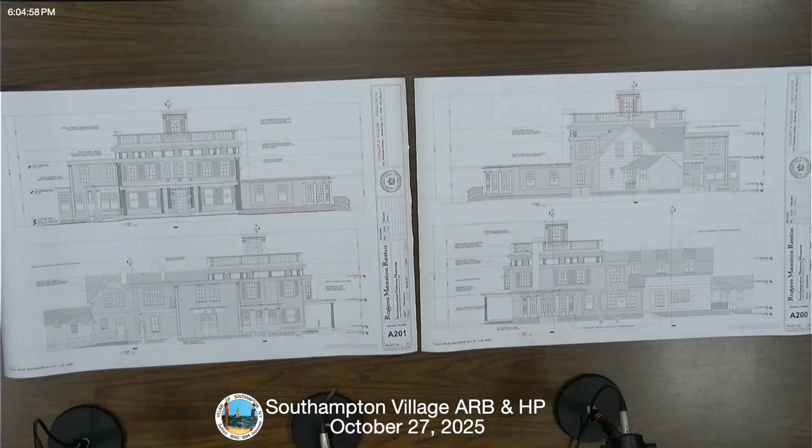What really needs to be restored is greater than that, but the project budget doesn't allow for it. So rather than do piecemeal around the building, which is sort of what was installed before,

we clarified with SHPO that we're going to stick to the original core of the 2.5-story forward part of the building. So that is the same 17 pairs of shutters, but instead of the various appendages that had been installed before we started this project, we will stick to just the 2.5-story oldest part of the building, including the cupola, which had shutters originally, but they've long since disappeared.

So the drawings that you have show bubbled changes as to which windows will include shutters, and I think I bubbled which would not, versus our prior submitted elevations.

Board members? I don't know what to say. I could, sorry, one more bit of information, just in case you're wondering what's going to happen to the rest.

When they have the funding to do so, the museum will restore all the shutters that were originally installed at different points throughout the life of the building. Some parts of the building probably never had shutters, but they will reinstall the places such as the south wing, west side, and south wing, east side, which have had shutters on it more recently, but those will not be included as part of this project.

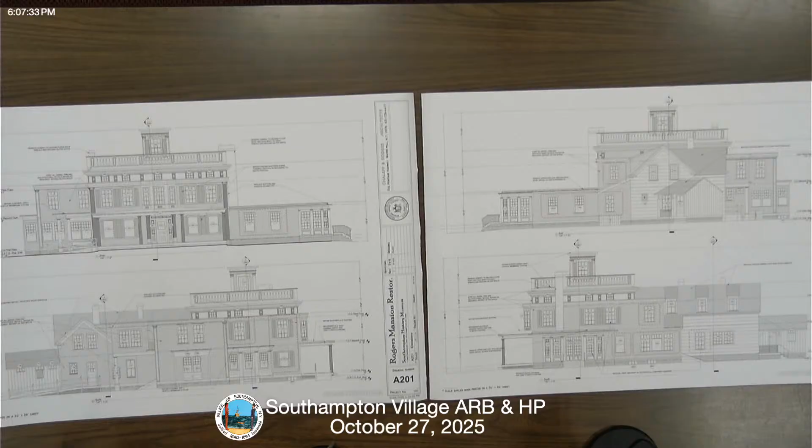I think it's acceptable. Great.

Do you have any idea about the length of time this is all gonna take? Well, most of the restoration project has been completed already. There are a few outstanding parts of it, including the shutters and some more of the windows. But the majority of the larger-scale work has been done already.

Okay, thank you. So what happens next? I think you can just vote on that. And how would we say that—the proposition to consider is that the changes are still ordinary maintenance and repair. I don't think you need to do anything more than that. Quinn, did you have something to say?

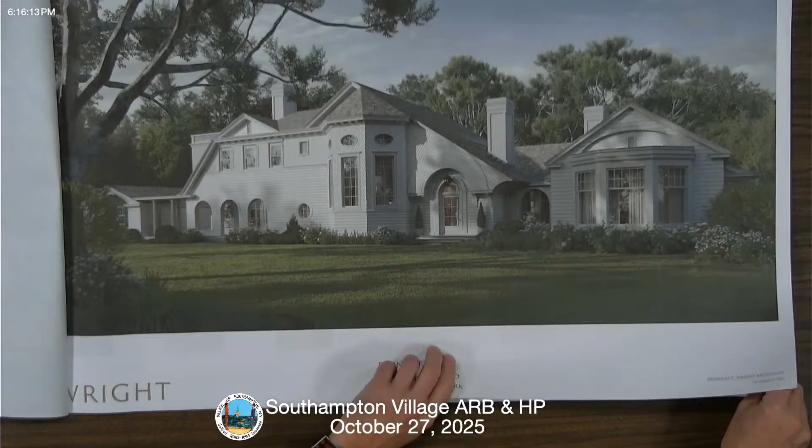This is a resubmitted set of items that you had requested: updated renderings, as well as some adjustments to the windows in the stair tower. The renderings are the major new portion of the submittal. So we have a front rendering with the smaller windows in the stair, and another angle of the front, identifying the materials: brick, shingles, painted shingles.

It's the rear of the house, again with materials identified: Doric columns, Chippendale railing, another view of the back of the house. Is the railing a new feature? No, that has always been on there.

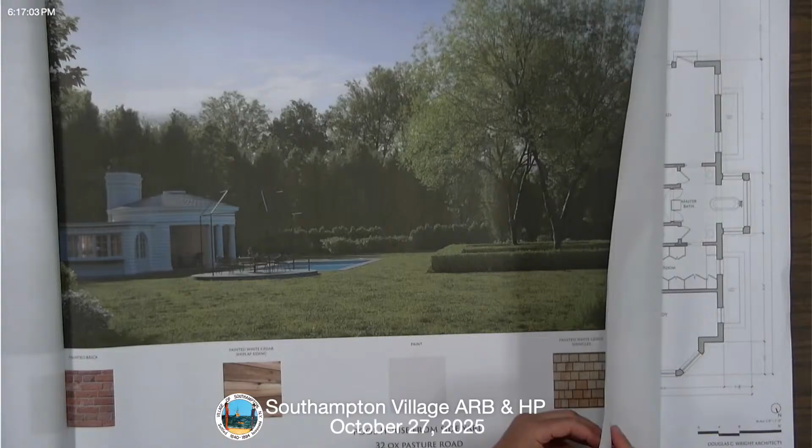And then a rendering of the backyard showing the pool house, pool, and gazebo, and then a portion of the back porch on the main house over on the right side of the rendering. And then the other items are basically the same. I don't know if you want me to flip through it or...

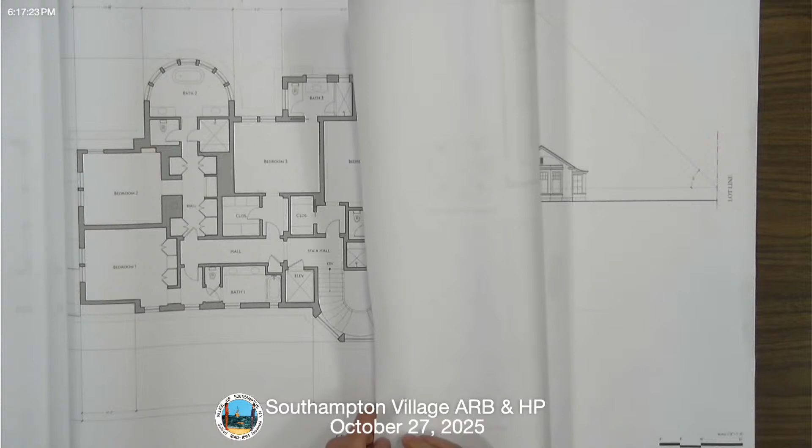So you had these previous renderings, right? Yes, we had submitted a watercolor rendering initially, and sometimes they want a more detailed rendering. I found that there had been substantial changes, or it was hard to see the different kinds of shingles on the first set of renderings.

Very hard to see, if not. So I appreciate you giving us a more specific look at what you intend. I found it to be an extremely busy facade with all the different kinds of shingles, including, I mean, everywhere. And although you changed those round oeil de boeuf windows into oval windows with cross hatches.

I find that discordant. I actually feel like the style of this house is not really in keeping with Ox Pasture Road. I think parts of it are good, but I feel like it's way too busy and ornate, considering the historic house that sits there now was an important house at one time, but it had been added on to and does not really contribute in the way that it should. But allowing it to be torn down, I feel like this just doesn't relate to the rest of the area, that it's discordant. Other board members?

So, what would you like us to do? Take a vote? No, I don't think you should vote yet. Can I comment on some things, and maybe that gives you some direction or suggestions? We don't need direction. That doesn't work like that. You don't give us direction. No, I think he's looking for... that's not what he's saying, he's looking for direction. Well, we're not... okay.

All I was going to say is there's a very famous house by John Russell Pope down the street on Ox Pasture Road that has a double gable, similar to this. And there are quite a few other white shingled houses in Southampton, and this was thought very much in that tradition. There are elements that are more in line with, is it Elm Gardens? This is the house he's referring to, which is a natural shingled house. Some of the other details recall elements of Elm Court or some of the other houses.

Thank you. I do think the highly detailed renderings, when requested, play up the shingle patterns a lot more than any of us really experience when you see them. I mean, I think we're all fans of diamond shingles or sawtooth edges, so I do think the shadow lines on this are making much more of the shingles than would be noticed.

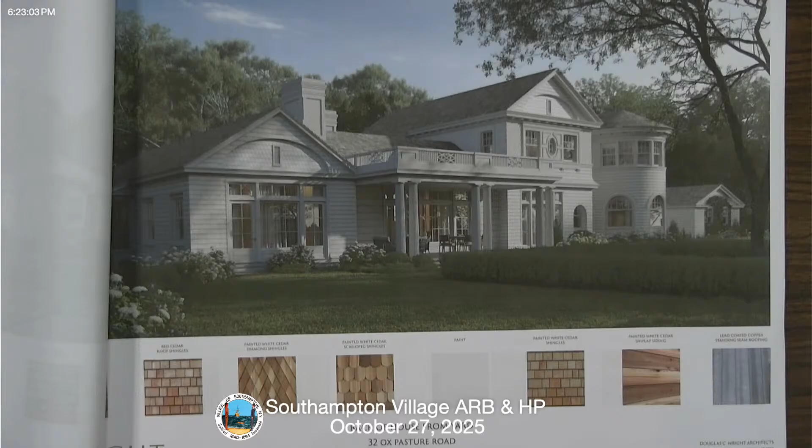But I think it's very much in the tradition of white painted shingle houses. Hearing your request for simplification, we could do some items to simplify it to get a positive vote. The busyness of the shingles, in my head, is first and foremost. They're not really typical of Southampton. There's a South Main Street house that they didn't do a very good job on, but that was famous, pretty close to the village, and it had different colors of paint that they took off, and it was a big hoo-ha for a long time.

But this has just way too much, even inside, like an ellipse, then there's rounded ones, and it just doesn't sit well. And the round, I never liked a lot of round windows. I know you took a lot of them away, and I could maybe live with that if we had something simpler in the facade. So I can't go with it.

So you're looking more for a classic, highly detailed railing as well? I don't even know, is the railing functional? What's the railing for, just decor? The railing is decorative, yes, it provides some balance to the porch. I feel like that's fancy in a way that I don't find convincing, I guess, also.

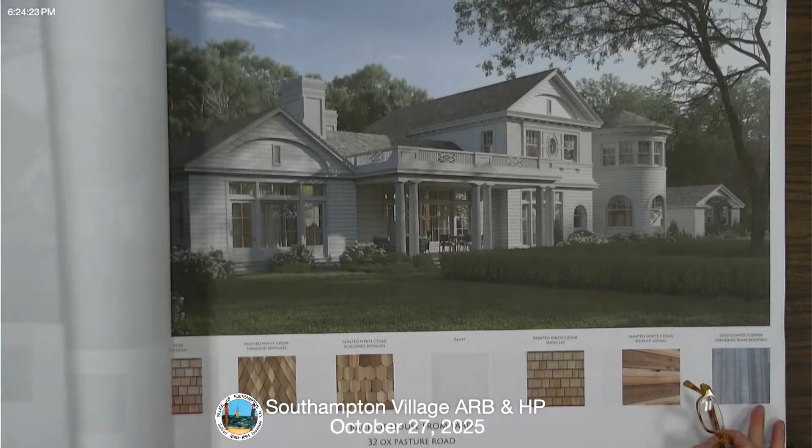But anyway, this is your house, so maybe you could come back to us next time with a simplified version if possible, so a much more simplified shingle style rather than a Queen Anne shingle style, which I think this is more. Well, I think it's a tradition, reference to the Russell Pope house.

So are you asking for an adjournment to the 10th of November?

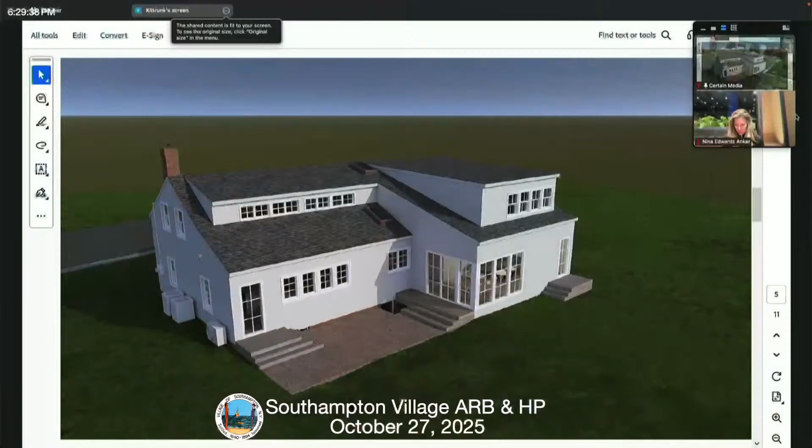Do you just have a measurement of how much you set back the dormer on the north side? Mr. Studenroth had said that either 1 foot or 2 feet would be appropriate, and we chose 2 feet. It looks better, going back. All of us think that was the successful change. Well, thank you very much.

Do you have anything else to tell us? No, unless you have any questions. I do not. Okay, public comment?

Public comment. Is there anyone here who wants to speak about this application? 7 North Sea Road. How about online? Nothing.

Then you can close the record for written decision. Motion to close the record and move to written decision. Second. All in favor? Aye. There's so few of us, it's kind of comical.

All right, you're on the witness, John. So just for clarification, do I get a yes or no today? You just got to wait, you know. Okay, thank you, that was kind of a yes. I'll have the decision. It has to be recorded, you know.

Because it really is historic, it's not pretend, but we voted to move to written decision, which means you're not going to have a problem. Thank you so much. Thank you, cheers. Thanks for your changes, you did a good job. Thank you.

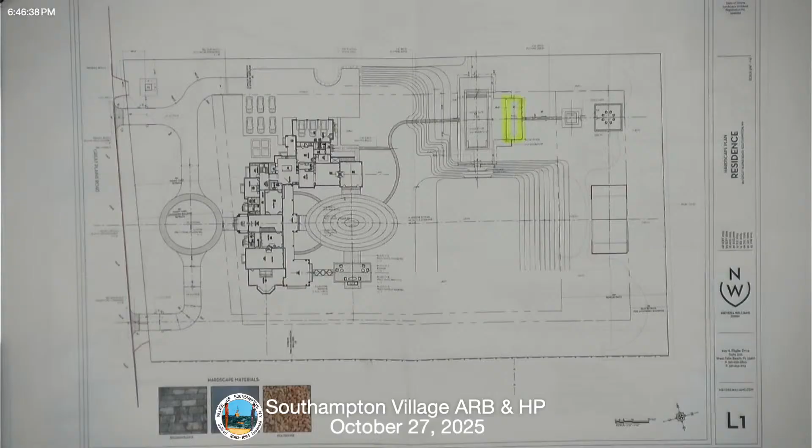Right, before computers. Okay, now I'll have to look at someone else's. Here, you can take mine. Thank you, go ahead, and I've got this. You need it? I gave mine, I saw that. Good, okay, all right, so this is the new version, correct? Correct.

Dated 9/23/25, right? Okay, but you have very little, okay, he said, you said your color and materials are the same? Yes.

It's a rectangle instead of a square now, with a different roof. There are 2 wings - did they just add onto it? Well, the other one had wings too, but it was squarer. It's pretty, it's a pool house.

Are these all windows, or is this open? The middle is open, and there are 2 changing rooms, a shower, and a small kitchen. It's all kind of open like that, which is better, I've got to say.

It's kind of a mess - it's all just open now, the whole thing. It's just a terrace with a roof, and there are 2 little enclosed wings for changing rooms. I don't have an objection to this, frankly. It would've been nice to have a more thorough treatment in the middle.

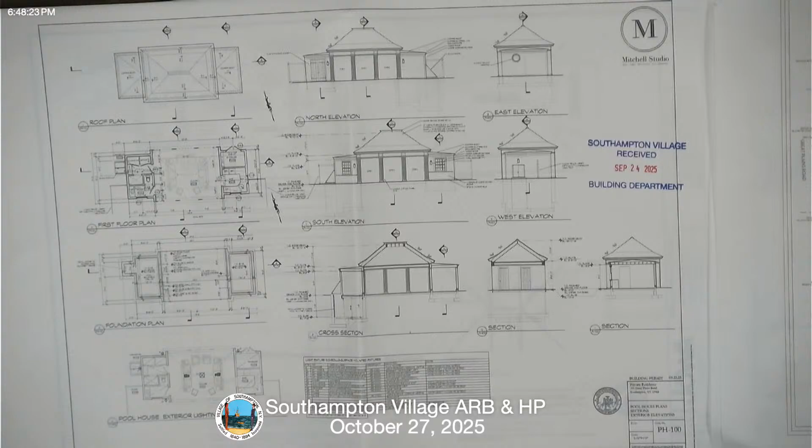So there's no doors anywhere on that - it's just all open. Well, the door to the bathroom and the shower. But nothing on the front or back, no glass. On the back there's a little storage room with a door.

Motion to approve the application. We need a written decision - motion to close for written decision. The address is 103 Great Plains Road. Second. All in favor?

Ellie Tamsin, 344 Hill Street - a shed addition to a pool house, previously approved plans. Oh, it's an amendment of previously approved plans.

Is there anyone here for this application? Absolutely not, online either. We have affidavits, so we can take jurisdiction. They're adding that little thing on the side, like an eyelash on it. Yeah, but I don't feel comfortable presenting it without them here. So why don't you adjourn it since you took jurisdiction?

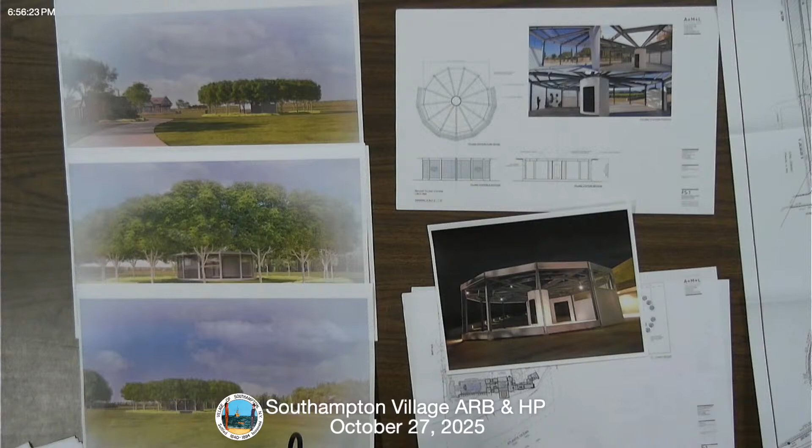We've also spoken to Simone Levinson, the chairperson, and Christina Strassfield, executive director of Southampton Arts Center. They're very excited about having this structure in the village. They're hoping their patron, who's also our client, will host some art events there as well.

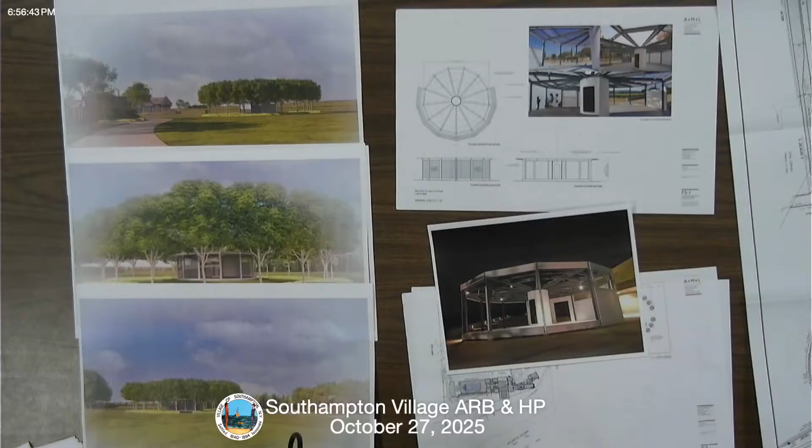We're more than happy to provide a night rendering, and we can give you more detail with the landscape plan about the fact that there will be no purview from anywhere to see into the light, and we know we have to be dark sky compliant.

Yes, you're in a historic district. It's an unusual thing, which I like, but it's a place where we have to be careful. If you were on Ox Pasture Road, it probably wouldn't matter that much.

My office is involved in that wetlands restoration on Gin Lane. It's right next to the large parking area for both the village and the Bathing Corp, as well as the trustees' parking. And there is lighting down there, I believe.

So that's not a good argument, just adding more lighting. That's actually private lighting. I'd say that's municipal lighting we're talking about. The trees are going to prevent us from doing uplighting, and the trees will also dampen any kind of lighting. I like the trees. We don't dislike it, but we have an obligation to deal with the historic district.

And you said it's 230 feet away from the contributing structure? Yes, correct. So do you think we could get that together by November 10th? Yes, we can, absolutely. So are you asking for an adjournment till then?

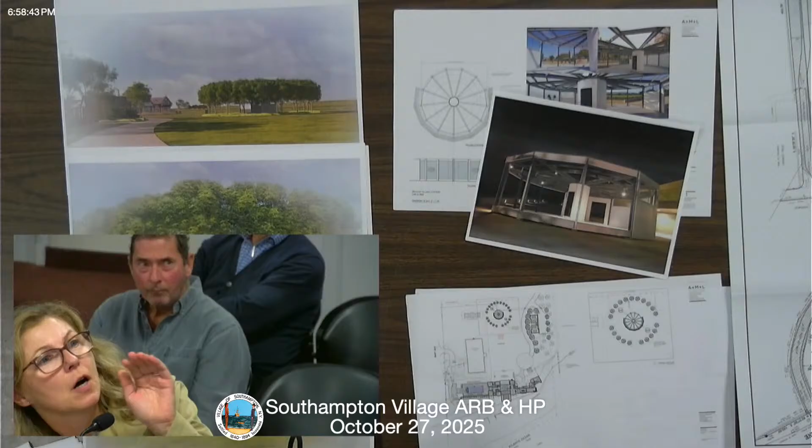You have to get up here, tell us your name, and stand before a microphone. Anna Kupczynska. Is there a roof, all glass? It's not, it's a solid roof. It's not shown in this picture. There would be a solid roof you couldn't see from there. And where do you live, Anna? 127 Pulaski Street. Thank you.

All right, motion. Anyone else? No. Anyone on Zoom, Sage? Okay. Motion to approve the applicant's request for an adjournment until November 10th. Second. All in favor? Aye. Thank you very much.

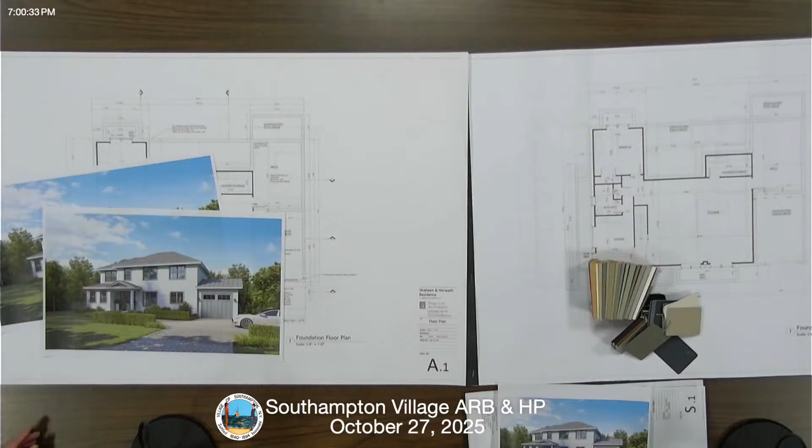Thank you. Here, honey, Susan. Oh yeah, the garage faces the street. Here you go.

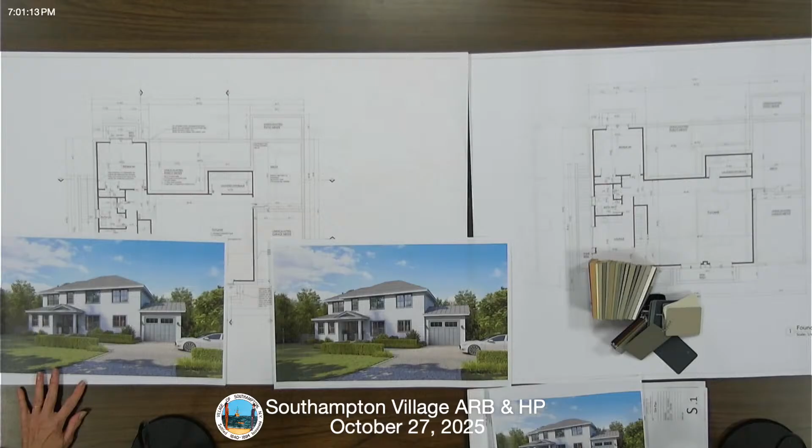For some reason I don't have 11 Henry. Lucy, is this in the file? The rendering wasn't about this one. Can I have a copy for the file? This is a house similar in the village. Could I use it first? You can use mine. Oh, this is for color, exactly, the black, yes, for graphite combination, closest combination.

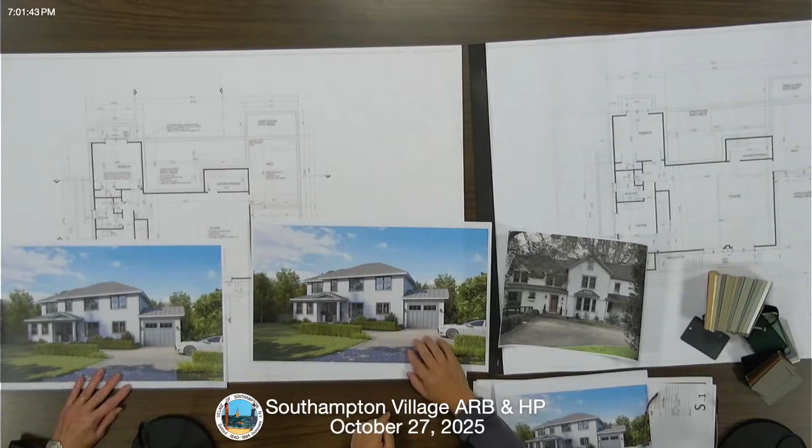Since when do we do street facing garages? The suggestion of a board member at the previous meeting was to change the profile of the front, to either recess the garage or bring it out by at least 8 inches. So we followed up, and thought it would be better to recess the garage. Looks better. Well, thank you.

We had a concern from a neighbor about too dark of windows. Instead of doing the gunmetal, which is darker, we went for a lighter shade, a cadet gray color. It's much lighter, so the windows are not so pronounced. Is that the same color as the garage door? Yes, exactly, this is the cadet gray. We were asked if we were using white frames, but instead we lightened it up because of a neighbor's concern. This is what we asked for last time, and this is the cadet gray we're proposing this time. We also have the white shingles that go with it.

There's currently a white house there, so it wouldn't be too much gray. We thought it's best to keep with the white shingles, and the cadet gray is just a slight contrast.

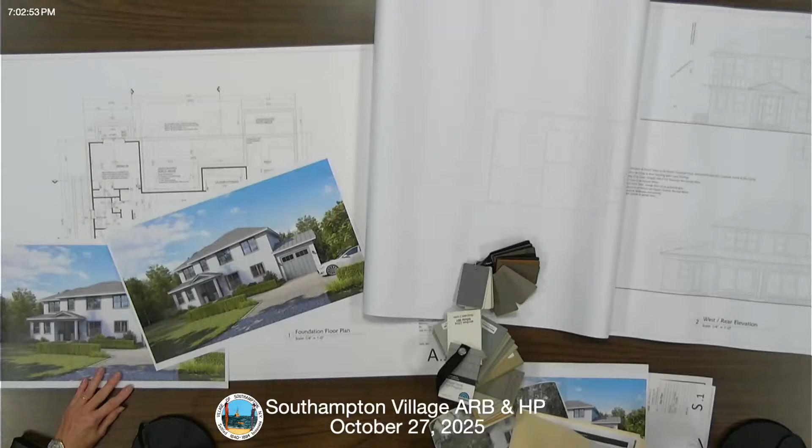This is the current house on the lot. What was the original? Do you have last week's first iteration? This is the whole file. It was about the garage facing the street, and thinking that was gonna be okay with me, but there's nothing really in there.

The front door is the gray as well, right? All consistent? Yes. Oh, the front door is black, I'm sorry. It's a darker color, yes. The garage door is gray.

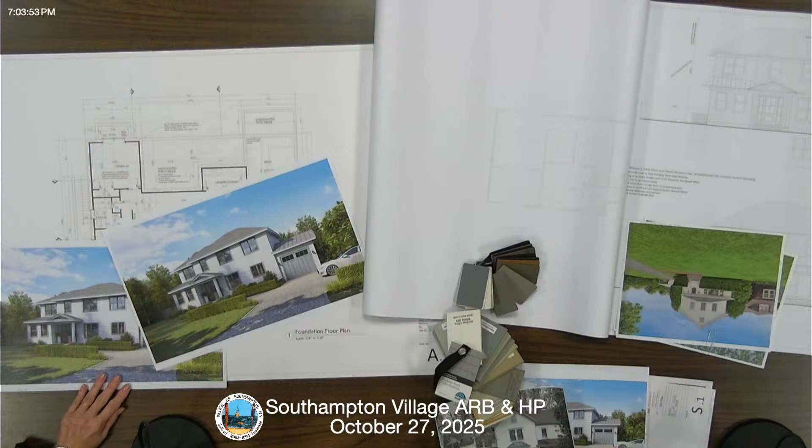So you can see on the rendering. I have an additional small one if you need. Susan, do you need a rendering, or I have another one here?

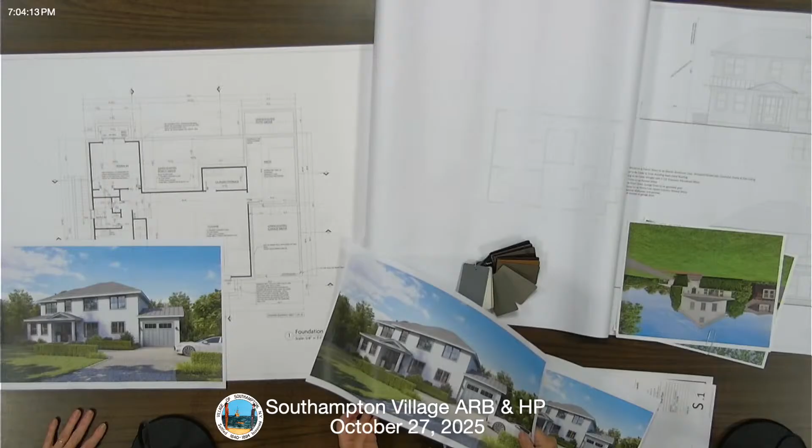Somebody else has to say something, because I just don't like it, with all the metal, black, gray metal garage door facing the street. I think it's strident. Above the garage we were hoping to have cedar, and I think the rendering came back a little bit more with the metal. We have to ask the builder if the pitch is right to have cedar, because we would prefer then to have cedar there, so it'd be more cedar.

And there's no way to turn the garage? No, it's a small lot, it's very small, or a smaller house with the garage turned, correct? I think it's a little undersized for the lot. But I don't like it, especially when it's tight.

The existing house has a garage in the rear, detached. We would prefer, if possible, to have an attached garage because it's next to the kitchen, it gives extra space, it's more usable. It doesn't become a separate structure that is not used as much in the backyard. And having the garage in the front, it's better in the winter.

There are, almost, I mean really, we have tried to not have that going on, especially. Okay, so that for me is kind of, and especially, yeah, I mean there must be a garage in the back. I didn't go in the back of the house when I drove around, but maybe I should have. It's way back.

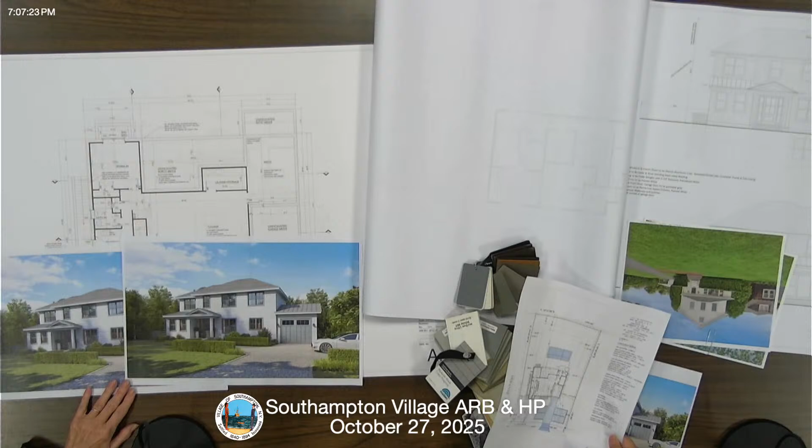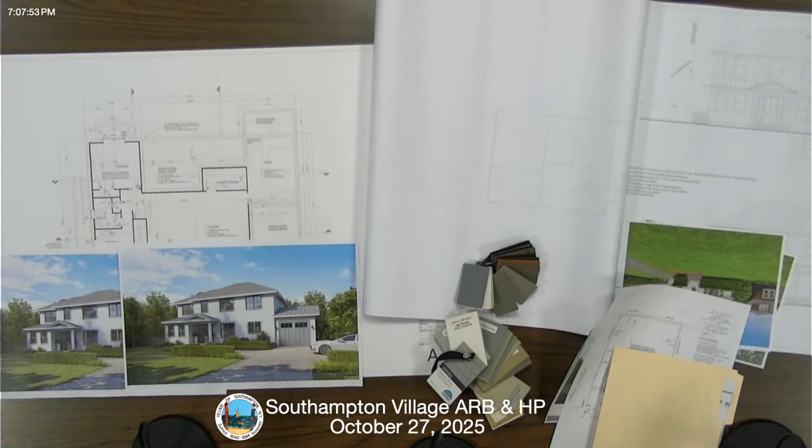Are there any other street-facing garages in the neighborhood? At the top of Henry Street, there is a house with the garage on the same side of the street, on the west side, already a house with a garage in the front. I don't know the address off the top of my head, but it's very close to the top of Henry Street. Meaning toward Hill Street? No, Henry Street is between Armand and Prospect, so it's closer to Prospect Street. On the corner of Henry and Howell Street, the house is a big white house, elongated, and it has the side of the house on Henry Street with 2 garage doors facing Henry Street.

And here you're proposing 1 bay? Here you're proposing 1 bay? Yeah, just one car garage. Just one.

Glass sliders in the back. What? Glass on the back. Oh yeah, way too much. So let's deal with the house.

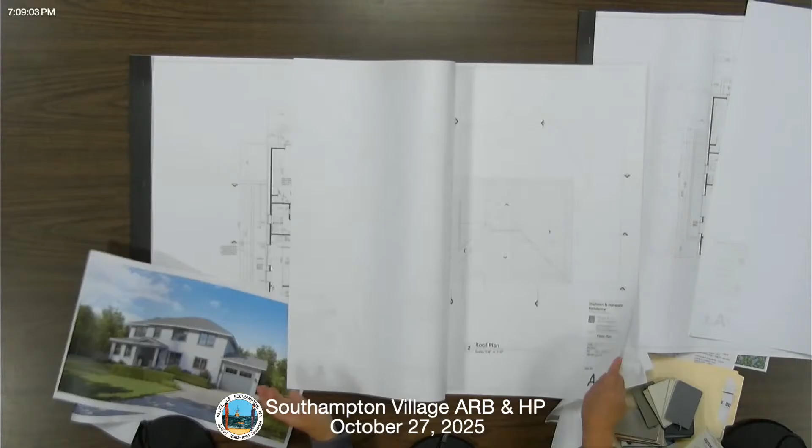So the back, this is proportion of glass to ratio. We have a covered porch and there's 3 glass panel doors. This is a Lacey special. So the amount of the rear west elevation has 3 from the living room and 2 in the dining room.

We can't really deal with the inside of the house. You keep referring to that, and that really is not our concern, but that doesn't matter to me. What matters to me is the amount of glass on the rear elevation, west, that it's pretty much metal roofing and glass. And the light, I mean there's almost nothing else. I think that's excessive, and there's pretty much the same in the front.

We built this house very similar to one on Edwards Street. The houses are all the same, but we always make you reduce the back glass, don't we? We've reduced the glass from our previous home, from the 99 Edwards windows. Okay, well we're only talking about this house now.

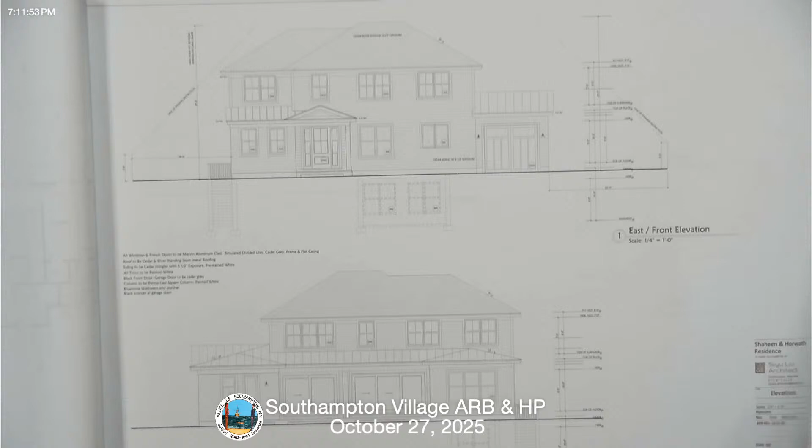Yes, we wanted natural shingles, and the rendering came back with the metal. Well, maybe we could clarify that. Because I think that would be an improvement. That would not be an improvement.

And the siding, I was asking - is it siding shingles? Excuse me, the siding is shingles, yes, it's like this. Painted? Yes, painted white.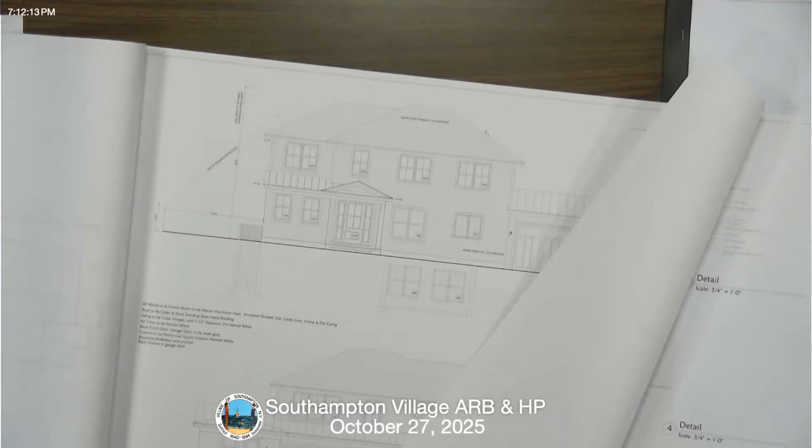The only area that has the metal roof should be where the pitch is very flat, like on a covered porch, and in the front. I can sign off on the metal roof over the garage into wood shingle right now. I think we gotta - I don't think we're at that point. Do you? No, we're not at that point.

Do we have the shingle color, because it looks gray in the rendering, the shingle of this house? It was gonna be gray. That was the first one, no, there's not gray shingle - it's white, an opaque white. Do we do a white? White, yes, it's white.

No, it's just confusing - it's white. Because is it an asphalt roof or is it a shingle roof? No, no, it's wood, cedar shingle. It's a wood shingle. So it's a cedar roof, just so we're all clear - a cedar roof, a white house.

Yes, the garage roof is cedar. Cedar, correct. We will also change it into cedar. Right, good.

The door's black, everything else around the windows is gray, and the garage door is gray. Right, cadet gray, this is the light color gray. And then the back of the house has a lot of light, a lot of fenestration.

But you see why we're a little confused - there's no list and we're looking at that picture. Yes, the list is - it's actually a white house, doesn't look like a cedar shingle roof, but it's written here. Is it a black door? Is that written somewhere we could check on the elevation? I don't know what to say about that.

I would make it a white door, I would get rid of the black door. Okay, so we could cross that word and change the front door to gray, the same color gray, to connect - yeah, we can change that, that's fine. Great, but we can't move ahead - this is too many things to just move ahead, I believe, unless we address the fenestration in the back. How can we address that?

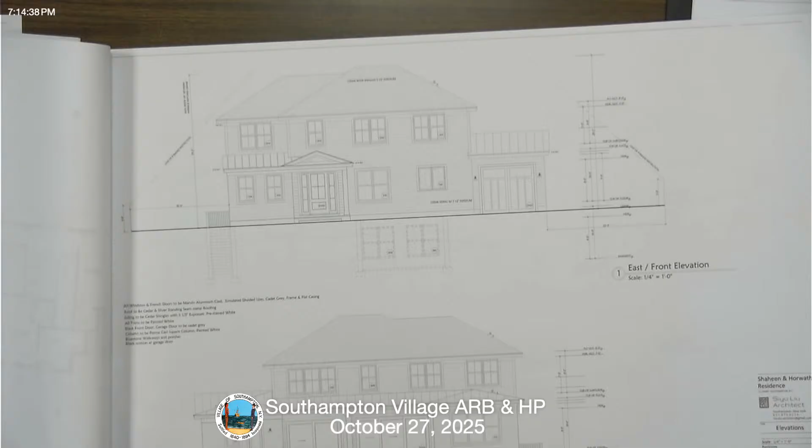Almost none. Well, we passed the HERS rating for energy control, and then the roof is, whatever covers the light doors, is covered. It's a deep porch there.

That's why we have the metal, well, it's a nice deep porch, so we can use the porch to put a dining table on it and chairs without somebody falling off the back. The porch is like 14 feet deep. That's why we have the glass, to get light in.

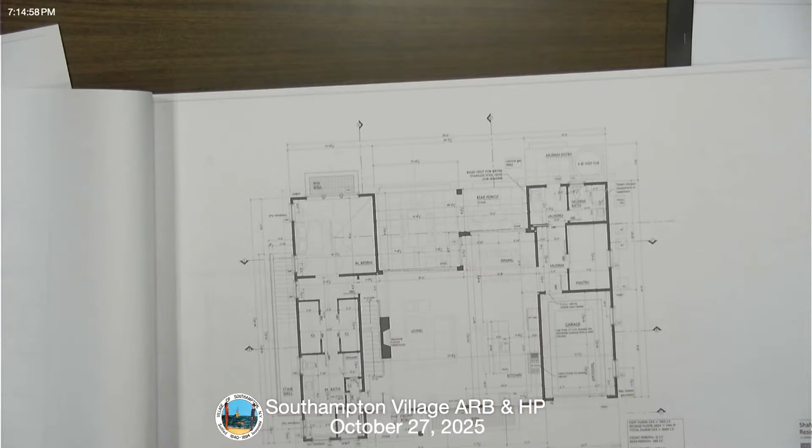And we passed energy. It's right here in the report. The porch is right here, it's a deep porch. They're talking about that rear big terrace, that the roof line overhangs the whole thing to the back.

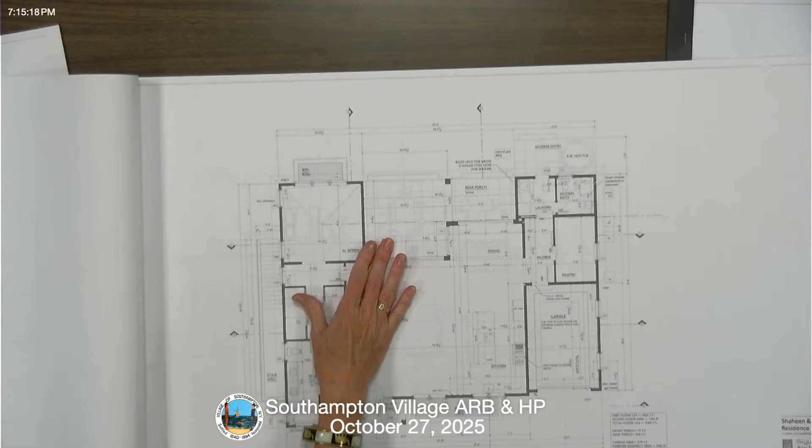What are the dimensions of those doors? What's the height, 8 feet? Do you have them? There's no numbers in there.

It's 12 feet. She said 12 feet wide. I believe they're 9 feet high? No, it's 8 feet high, okay.

Okay, we'll have the measurement of the glass doors right now. So the glass doors, the set of 2 versus the 3, they're not right up next to each other. One's pumped out, pushed out.

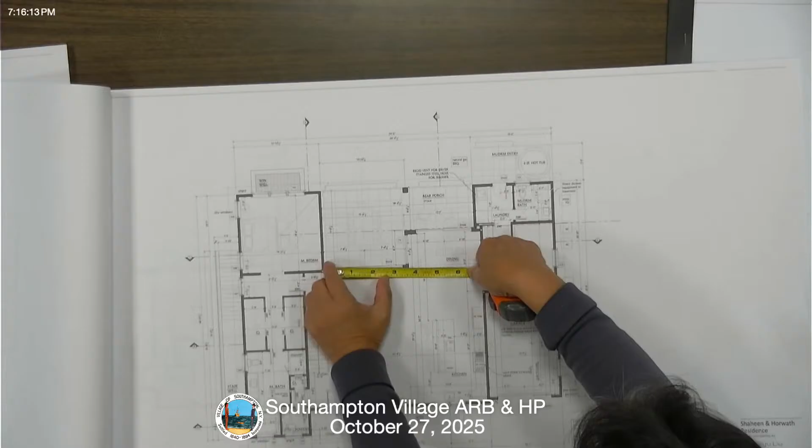That's a whole different feel from the rendering. There's 3 doors, and then there's an angle with a piece of glass, and then you have 2 pieces of door where the porch is narrower. We did not do a rear rendering.

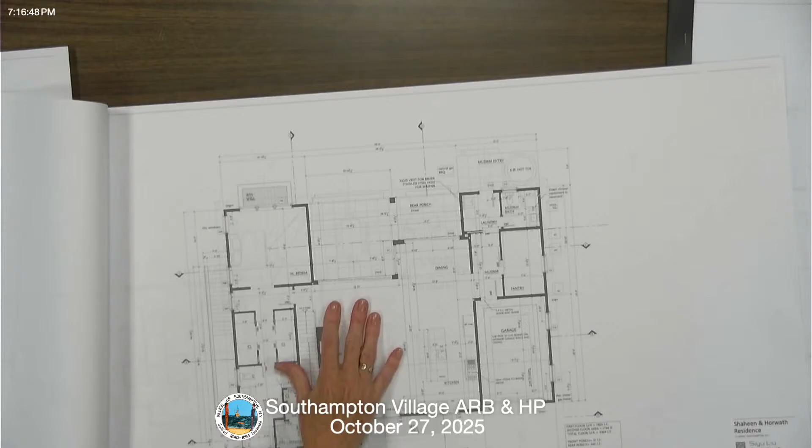That's completely different. So the set of 3 doors back here, and this is wings of the house, it's all covered. All three doors, all the sliding doors are covered. A very deep porch.

And that's why we have the glass, because when you have a covered porch, it makes your living room very dark, so you need more glass. Yeah, that's very different now. And then you can enjoy your backyard when you're sitting in the living room.

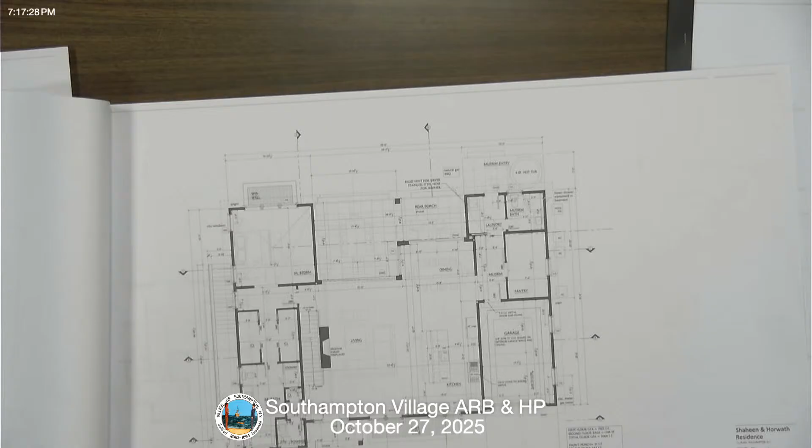So the covering over the 3 doors goes to the line where the 2 doors start? Goes all the way to the back. It's almost 15 feet, a 15 feet deep porch, right?

Okay, as far as the roof, the cover. Yeah, it's like 14.9, the patio is 14 feet 9. The whole thing's covered, with the eave. It's 15 feet. Why isn't there a better rendering where you can see it?

It's in the drawings, but not in the rendering. It's to allow in the summertime so you can have guests outside and flow with the living room in the small house. We just want to see the house.

Okay, board members, does that mean we've resolved anything here or not? Well, I think that the overhang over the sliders might be okay. Yeah, I agree. I'm still not happy with the front-facing garage, so much attention drawn to it, as if it's the main feature of the front of the house.

Do you think if it was pushed back more than 8 inches, it might help? But then the laundry room or the mechanical room, aren't you? Well, I'm just curious, if you pushed it back a bit more than 8 inches, it wouldn't be in the front per se, it would just look a little more natural as a garage.

Do you have a little more room to push it back some more than just 8 inches? No. You can't max it out?

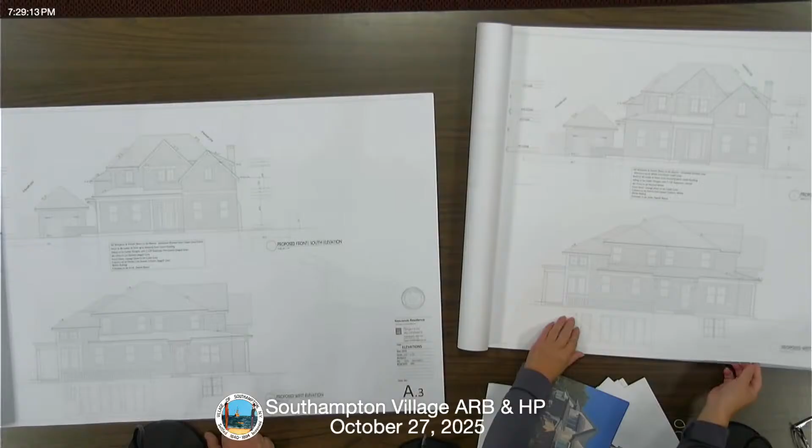Okay, and then we cut off a lot of lights in the back. This is the back. And the chimney is what? Danish blend brick. Doesn't look bad, no?

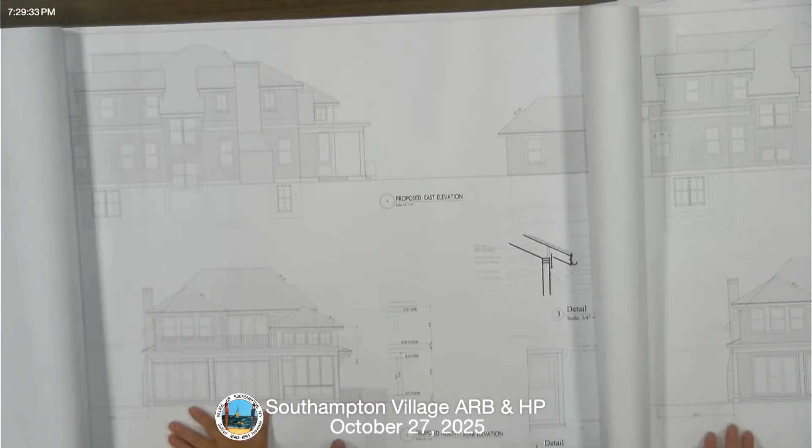We cut off one door panel in the rear. We cut off all the transoms, both in the breakfast room and in the living room. We cut off all the transoms, and we took one glass panel off here, and therefore we reduced more than 20% of the glass.

What about the balcony above and all? Yeah, we'll go back to that next, but let's just stick to the glass, and then we'll talk about the balcony. So it's like the Henry Street project, the lower doors, it's the same situation.

They are pushed back because this is a 2D drawing, everything appears on one plane, but they're 14 feet deep, and there's considerably less light coming into that lower level.

Could I ask about the chimney? It's not tall enough, is it? What is this? That's not a chimney, is it? Can you point it out again?

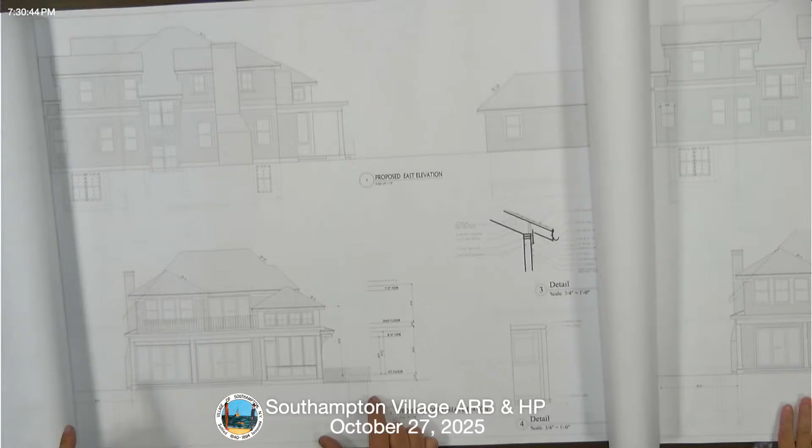No, that is a chimney. Yes, that is a chimney. Looked like it to me. Yes, that is a chimney. So why doesn't it go up higher than the roof? Doesn't it have to clear the roof? I mean, yeah, something's wrong.

It clears the first ridge here. There's rules, I don't know what the rules are exactly, but it has to, I'll look at it. It should be up near the roof, but that's up to you. It's just saying it has to go beyond the roof, and that does not appear to be that way, but you could explain it to me.

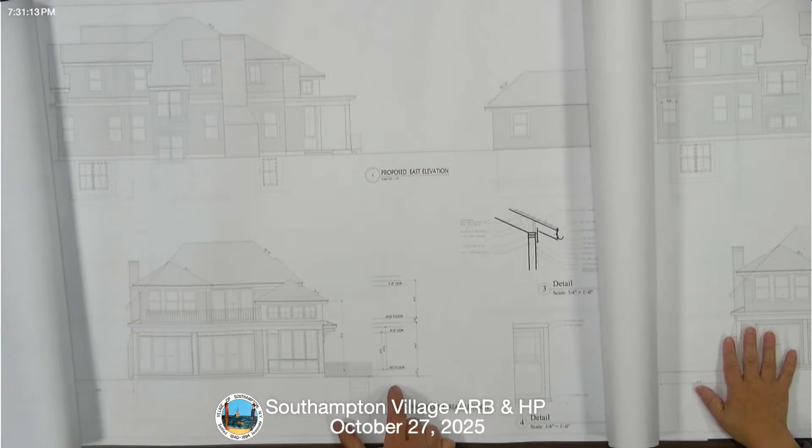Yeah, there's a peak, look. It's about 2 feet, with a 10-foot projection. I might have drawn it a little too short. Yes, you're right. Well, how did that go past the building department?

What is going on? No, we go to ARB first, we didn't go to the building department yet. Our building department didn't even look at it yet, to see if it was legal. Well, a building inspector would have had to review the plans for zoning compliance. After ARB approves, we go for the real building permit.

What are we doing? This doesn't make sense to me. Why am I finding this? I am not in the building department, I'm in the ARB, and I don't know why I can see that the chimney is too short. Well, the plans were reviewed for zoning compliance, and they're gonna get reviewed for building code compliance, otherwise they won't get a building permit.

I know, but doesn't that go to them before us? It would have. Okay, so that's supposed to go to them before us. So I guess let it go to them. I mean, why are we wasting this time?

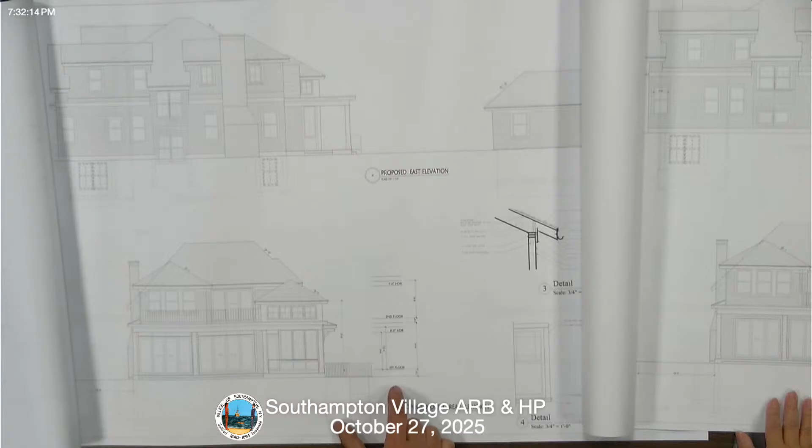I don't understand how we're doing this in the wrong order. But it's the same project, it's different. Does it make sense? I don't know, it is different because you're gonna have to change some of the design perhaps. Right, well I think we should continue.

This was signed off by the building inspector before it was advertised for a hearing. Who, does it say which one? Looks like Kyle Matheson.

What do we do? Alex, could you give us some advice? They don't look at this yet. This is the same chimney. They look at the code, poorly presented. They look at setback coverage, and then they just look at the materials, which are so poorly rendered and presented that it's super difficult. The chimney's maybe the right height in one place, not the other. I think it's a lot to ask to bring terrible, unprofessional material to us.

Let's keep it civil. Okay, it's very hard, there are inconsistencies in this entire package, and it's very hard to consider and very hard to read.

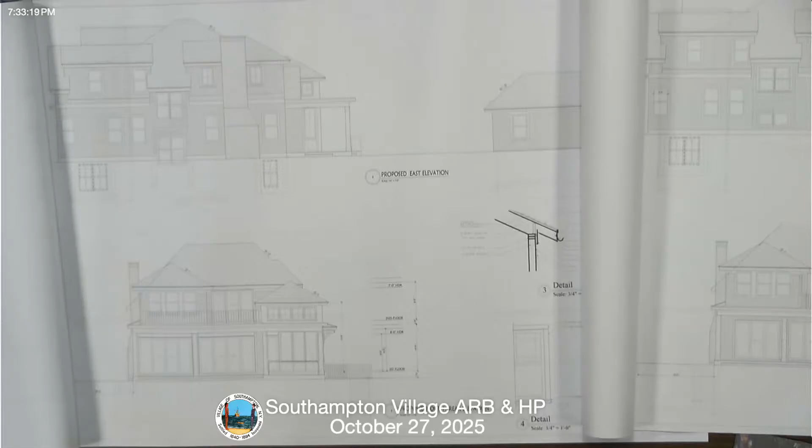Yeah, so here's the chimney, here's this page, you can see A4. But that still doesn't... we're not Sherlock Holmes. I don't know, all right, well let's just keep going. I don't know, it's a little, it's quite difficult, I have to admit, sort of groping around in the ether. Can we just understand what the problem is? Are we talking just about the chimney, or what else are we talking about?

Can we focus on the material and the color? No, we are running the meeting, and we are asking you questions. You can answer them or choose not to. Okay, fine. So part of it is the chimney, which isn't resolved and will not be tonight, is that correct? I don't want to be spoken to in that way, sir.

We're going to the gas chimney, right? With gas fireplace? Yes, this is a gas fireplace. I don't need to clear the roof. Okay, so we can refer that back to the building department. This is purely just for the look. Well, it's also the materials, Lucy. Yeah, I meant the brick chimney that we put in here is not really necessary to put it there, we put it there for the look. Because it's a gas fireplace, all I need is a PVC pipe, and then I can have a little cover on the roof and I'll be finished.

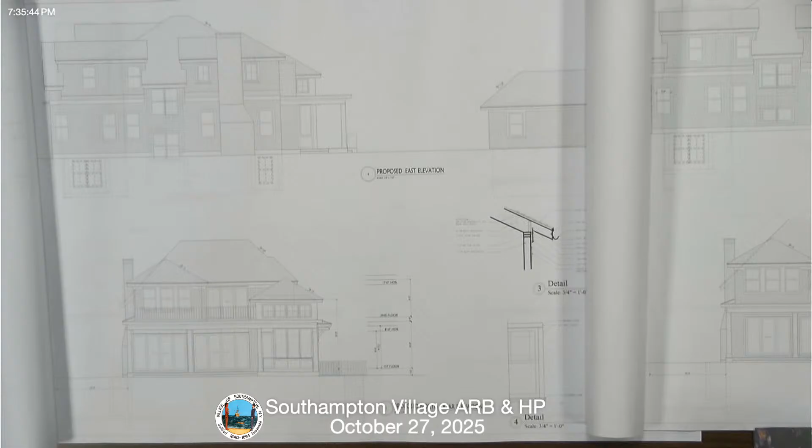And then something was blanked out. That was a pool house that you can't do. What is this, what's blanked out? It's by the pool. Oh, it's a patio? No, it's a pergola. A pergola? Yeah, the pergola was on the original application.

How many bedrooms are in this house? Six. And the parking spaces? Five.

How many feet is the garage from the property line? There's a line drawn, you mean the setback just here? Like 12, 20, 12 feet? Here, 12, are you asking this part? Yes, the 12 feet, the green line. Okay, they've got that pretty well, that's not even our job.

All right, let's go back to how it looks in the front. So, we're gonna do cedar roof and natural cedar sidings, natural cedar roof, and we're only gonna have a tiny bit of metal roof in the front. All the windows are gonna be white, the trim's gonna be white, and we're gonna do the door cadet gray, which we have right here.

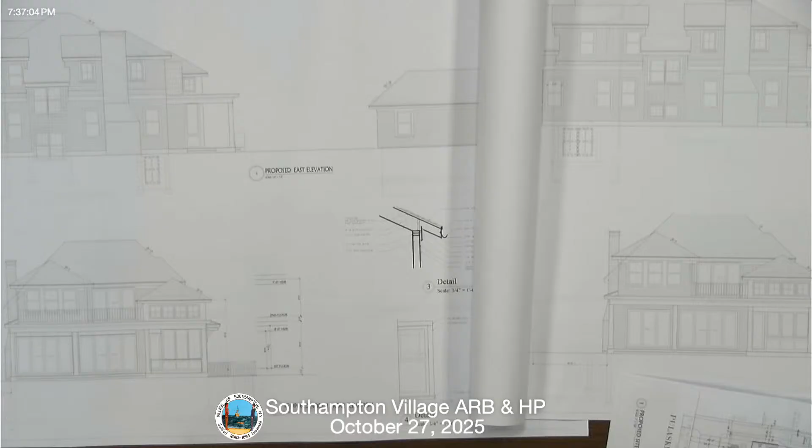So only the doors are cadet gray, and the metal above the front porch, right? And does it hook up to the cedar roofing? No, it just goes into the wall, it's by itself. Okay, and what color, that lighter gray? It will be light gray, yeah, or something like a cadet gray.

Seems to be bandied about here tonight. What's the light there, is it in the ceiling? Yes, all recessed lighting, we're doing recessed light everywhere. Oh, you are? Yeah, you can't tell. Okay, well, I'm feeling better about it. Looks like a vent. Yeah.

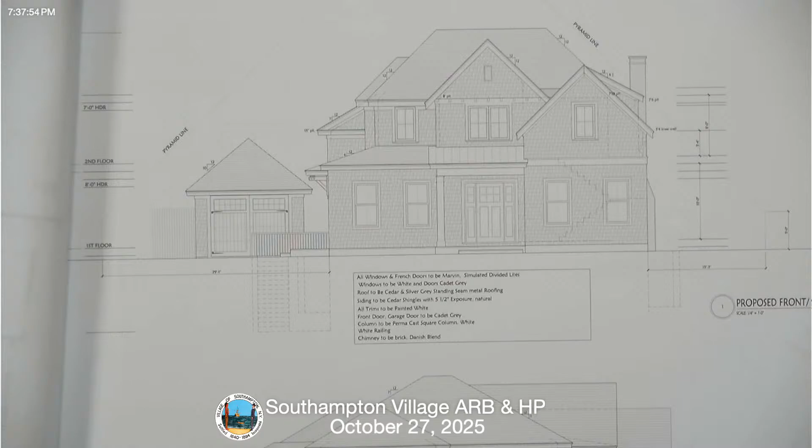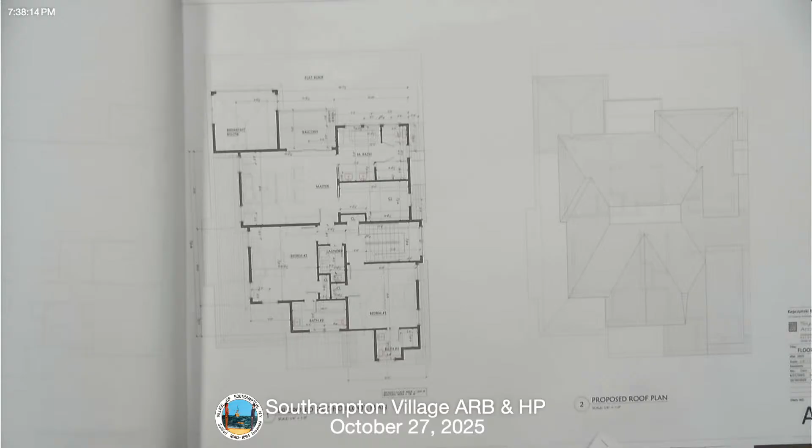Okay, so should we get to the balcony in the back? Are we done with the front? So we feel satisfied that the light, because it's recessed, is all right? Yeah, didn't we do this once before, can you go out on this little balcony? Yeah, we're doing a small balcony, I actually did a presentation here. How deep is it? The depth is 8 feet, 7'11".

That's not so small, and on this side is a roof, so it will totally block you. On the other side, only 3'6" is passing this side of the roof, and we're gonna put a screen here.

Like a wooden screen? You can see there's a screen here. How come you don't have that? No, I don't think we have that prepared today. Oh, I should have been able to see that. I'm sorry.

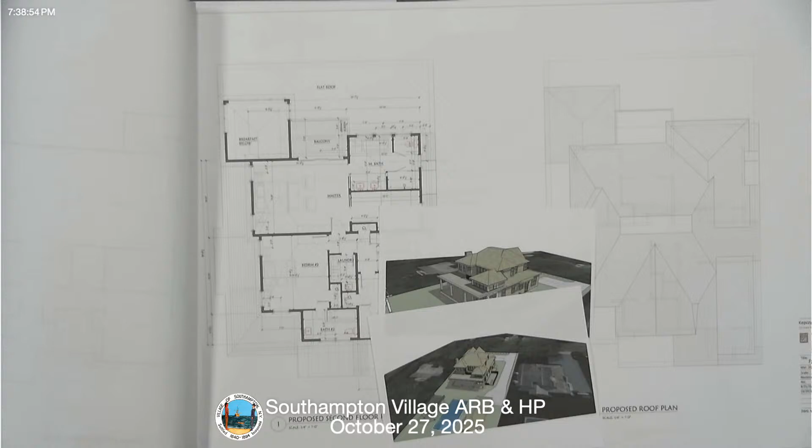Well, that should have been in there, I mean, it's like a free-for-all. Thank you. I mean, you know better. There's rules, why have them if we just don't follow them? I'll just look at this. Oh, here, I gave him mine. No, you can have mine. All right, that's a big help, Lucy. Thank you, could have been.

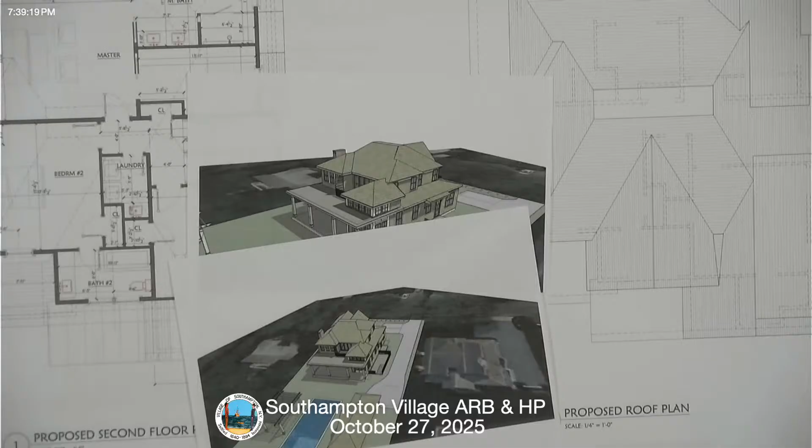And the house, so what is this, the trellis that's on the balcony? It's like, you know, if you're in a hotel, it's like a flat slatted wall, like a fence.

What's the depth? 7'11", it's the depth, but the part that actually sticks out is only 3'6". But that doesn't mitigate noise or whatever. It's a tight lot. So what's the length? What's the square footage? What's the width and the length? The length is 11 feet. So it's like 88 feet, plus minus.

And this is off a master bedroom. Yeah, that's what everybody says, but I don't know what people's habits are. How close is the house next door? Do we actually have anything that would tell us that? No. I was over there, it's tight, right?

But there's two houses, Pulaski, 60 Pulaski Street, which has a similar situation where there's a second floor balcony. One side is screened with some kind of privacy wall, the other side is a fireplace. And my neighbor, 117, same thing, he's got a little balcony on the back. I actually had a conversation with him and he didn't object.

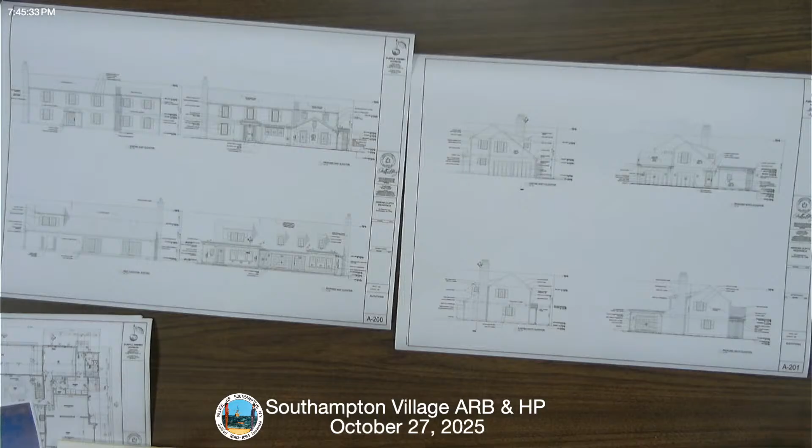Do we have anyone from the public who would like to say anything about this house? No? Do you have any more to say? No, I'm actually trying to keep it quick. You guys got a lot of stuff to get through, so we appreciate the changes.

I have one question actually - the back of the house, that second floor window with the shutters, that's existing? Yep, that shed dormer kind of gave us the vocabulary for the new three dormers we have. The shutters are like this big, and the window is this big. We could change those if you need, but it seems they look proportional on the rest of the house. That was just one that was way off.

Motion to approve the application of Hampton's Hideaway LLC, 145 Somerset Avenue. Second. All in favor? Aye.

Aye. Good luck, thank you, sir. Thank you so much for the nice work, making the changes made a difference. Looks great, appreciate it. And it's nice to see you guys in person. Last time was over Zoom. I hate Zoom too. Pretty awesome, that street, considering. We've been there a lot too. It's our home away from home, a great holiday season. Thank you, guys. You too.

Here we go, 161 Breeze Lane. Is that right? Yes, we have the affidavits and they're in order. Didn't we already do this, was there a carryover? No, it's new.

I think I put up the existing house. Pretty straightforward application, hopefully this is relatively quick.

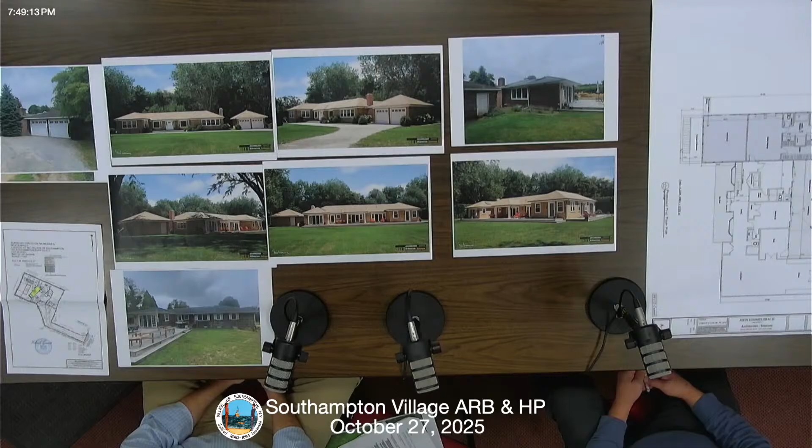And in the back, there's a rear porch. We did a covered section for a covered area with a hip roof to match the pitch of the existing house. As you can see in this image, that's the existing house, and this image is the back of the house, which has an asphalt roof and natural red cedar shingles that have weathered over time. So it's basically dressing it up, rehabbing it, and adding an addition.

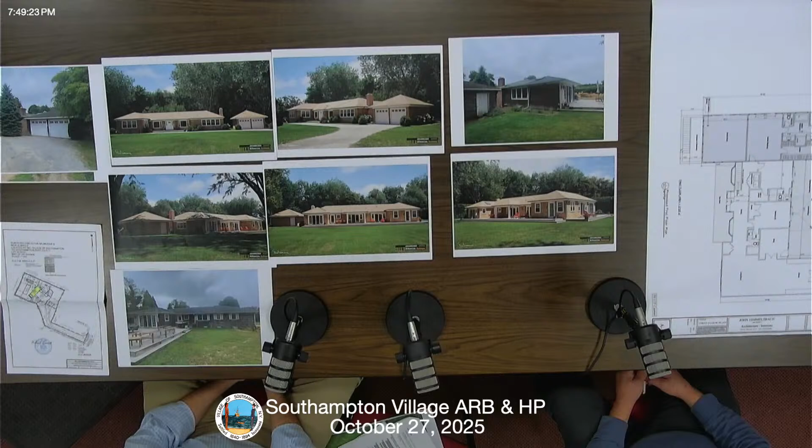And on a pool house? That pool house is separate, that was a separate thing, but it was approved already, a while ago. I see a photo, so all right.

I think it looks great. I think it's cool, I think it's great, very sweet. Yeah, I like it, very nice.

Did you put all the materials and outdoor lighting pictures? We have all the, well these are all dark sky compliant. All outdoor lighting? Just got everything here? Typical carriage lights, yeah, I skipped, I didn't look at those.

Is there anyone from the public who would like to speak on this application on 161 Breese Lane?

Nope, okay, thank you. It's a very well organized, very clear presentation. You honored the ranch. It's got nice street appeal. Have a ranch once in a while. Yeah, I'm coming to that - as I get older, I'm like, the ranch is cool. I know, it's sad, it's tragic that they've removed most of them.

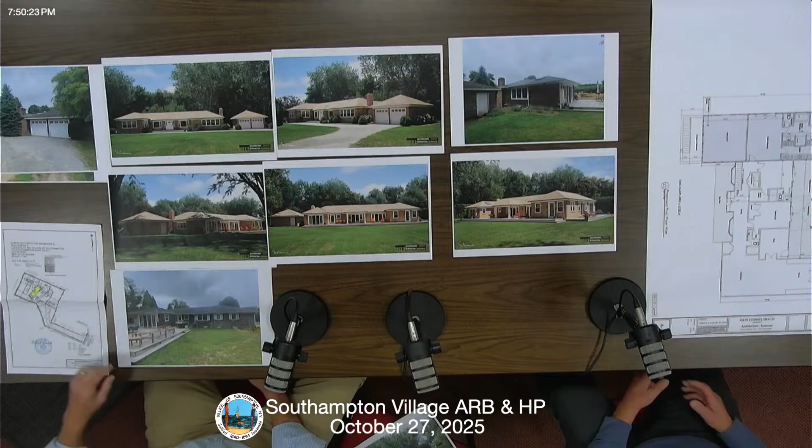All right, motion to approve the application for 161 Breese Lane. Second. All in favor? Aye. Good luck, sir. That was a quick move. Good for you. Good luck with your project. Enjoy your house.

Now we have another Breese Lane, right? They got the award for fastest - 119 Breese Lane. It was organized, it's great. That's how it goes. So we have the affidavits and they're in order. That's great. I love the before and after. I do too, lots of before and after.

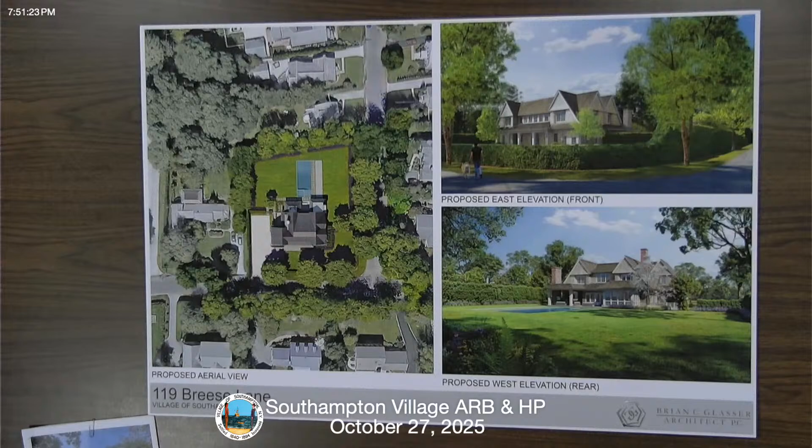119 Breese Lane. All right, good evening. Hi there, my name is Brian Glasser. I'm the architect representing 119 Breese Lane LLC, and I do have the homeowners here with us today. So to get started, I just wanted to locate the house. It is on the corner of Breese Lane and Cooper Street, on the south side of Cooper.

We are proposing to demolish a house that was built in 1950 that I believe has no historical value. It is a single-story ranch, roughly, including the garage, around 2,600 square feet of footprint. The house is wood framed, asphalt roof, and a painted siding material.

Do you have a photo of the house you can show the board? Yep, here it is, in the package. Can you put it on the screen so people can see? So do we have to do a demo evaluation for them too? A demolition evaluation, yes. Should we do that now? Yes, probably. All right.

Does anyone on the board feel that I have to ask these questions - do you know the approximate year the existing house was built? 1950. Thank you. What was the answer? It was 1950.

So does anyone think it should be landmarked? No. Okay, motion to approve the not landmarking of 119 Breese Lane as it stands today. Second. All in favor? Aye.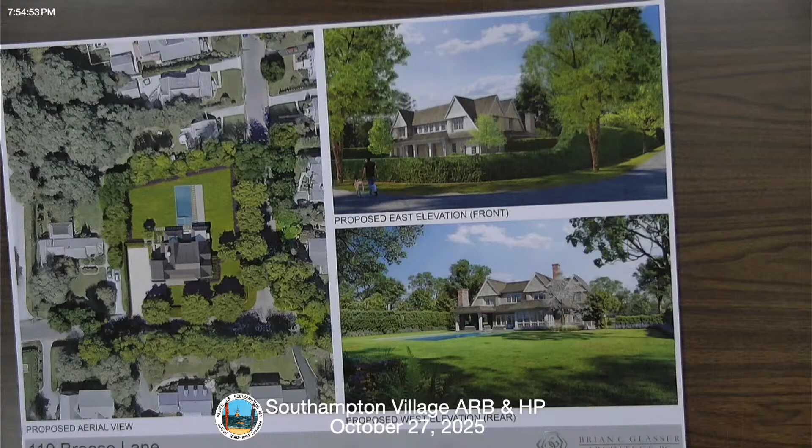The gutters and leaders will be lead-coated copper, a half-round gutter and a round leader. The siding will also be Alaskan yellow perfection shingles, with a 5.5-inch exposure.

The chimney product we're going with is a masonry Danish blend veneer, manufactured by Glen-Gery. The windows we chose for this house, we went back and forth a few times.

The final selection was a Marvin Elevate product, which is fiberglass, and we're choosing a custom off-white color instead of standard white from Marvin, to give it more of an antique look.

The trim will be primed and painted PVC, in the same white color we select. Columns will be 14-inch square, also painted white.

Patio surfaces will be bluestone with a brick riser to match the chimneys. The chimney flashings will also be lead-coated copper to match the gutters and leaders.

We have a few railings, mainly on the lower level around the window wells, shown here, which will be a natural cedar product painted to match the color of the windows and trim. Where the garage is, we have larger soffits, so wherever there are doorways we'll have downlighting.

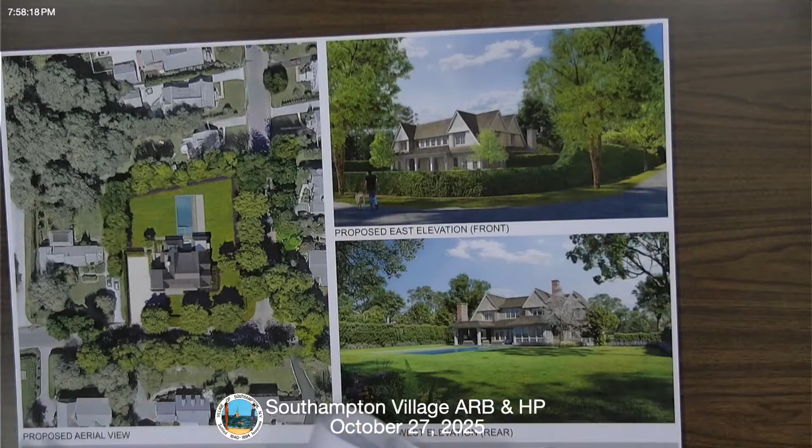Are we ready to vote? Motion to approve the application of 119 Breeze Lane LLC. Do I hear a second? Second. All in favor? Aye. Aye. Amazing, thank you. Good for you, beautiful house. That was fast.

Bye now. 100 Halsey Lane LLC, 207 Halsey Street, demo of existing dwelling. I got nothing. You gotta give it to me.

Do we have to do another one of these demos? I bet we do. Let's see. Yes, I need the affidavits then.

Hold on, I gotta see if we have jurisdiction. Yeah, I need that. How's that possible? 100 Halsey, here we go.

Can't even believe it. Sage is gonna give this to me. This is a note, these have to be completed. Okay, this was sad, this doesn't say anything. You didn't complete it. Yeah, too bad for us. Please do.

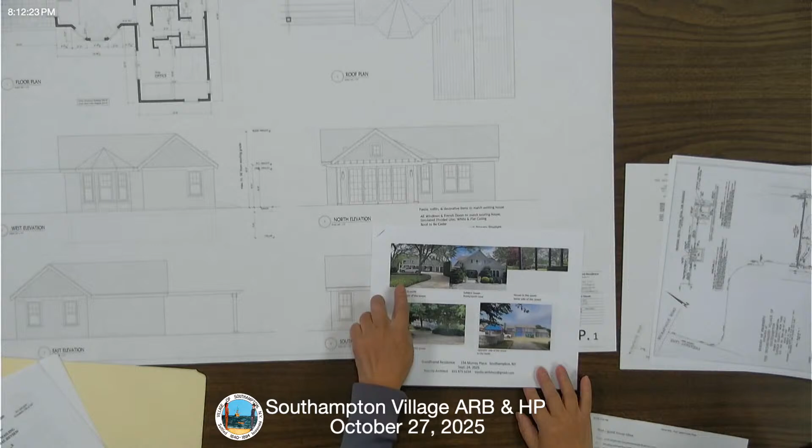This one you can barely see. This is the only house visible from the street, and this is the subject house. On the next page you can see the house. We are building the pool house to mimic the existing house - all the materials will be exactly the same: white shingles, white columns.

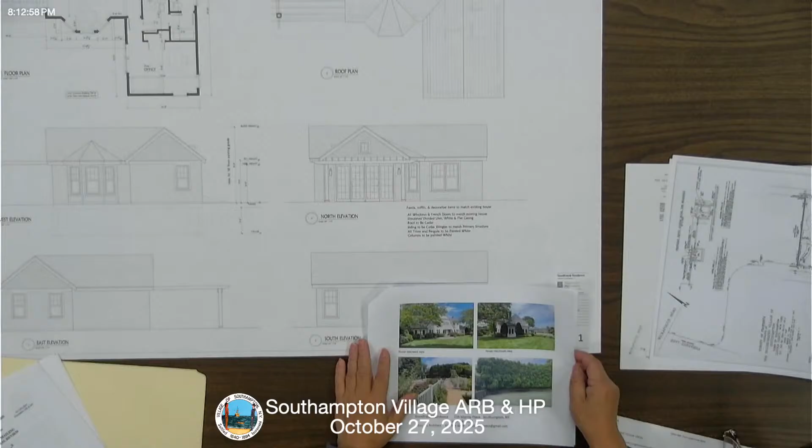It's tough to find these things on here. I normally put the material list right under - it'd be nice if they were in the margin somewhere. Oh, you like it? I will do that next time, since it's just underneath one of the elevations and it's small. Okay, so there's room over here. Yeah, I'll do that next time.

Any comments from the board? No. From the public? No. Motion to approve the application of Sydney Goodfriend. Second. All in favor? Aye. Aye.

David and Danielle Ganek, 1030 Meadow. I do not have affidavits, do you? No, I really, really don't. No, I do have them. Oh okay, the affidavits? Yeah, I need to have them. I know. Yeah, but not before the meeting. Yeah, we're here now, thank you. Okay.

Okay, these are in order. You can take jurisdiction.

Hello, I'm Steve from Alberia Architecture. How are you doing? Hi, good evening. Can you just say your last name for the record, please? Yeah, Kristofsky.

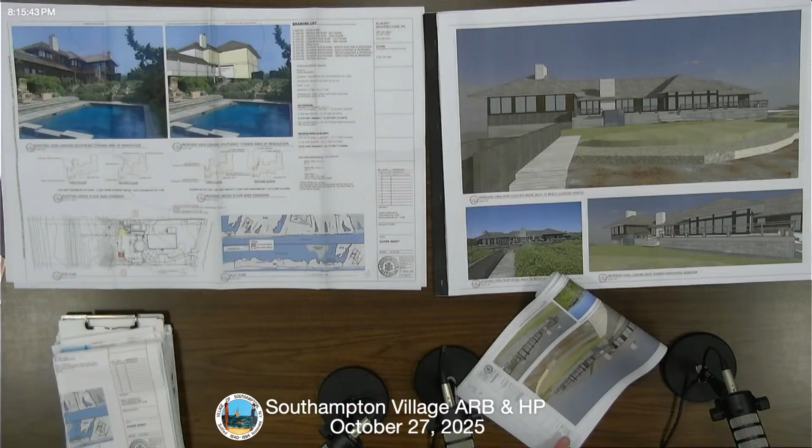The beach is considered a public right of way - I did start to get renderings, they weren't ready previously, but I do have renderings now from the beach too. I just wanted to go on the record.

I brought additional renderings, and I have some for you if you like. I went over there, but I didn't dare go see exactly where this was going to be. So you're adding on - it said 212 square feet, is that right? Yeah, there's really a kind of dance between lot coverage and gross square footage, but we're not close to either one - we're really just revamping the master suite.

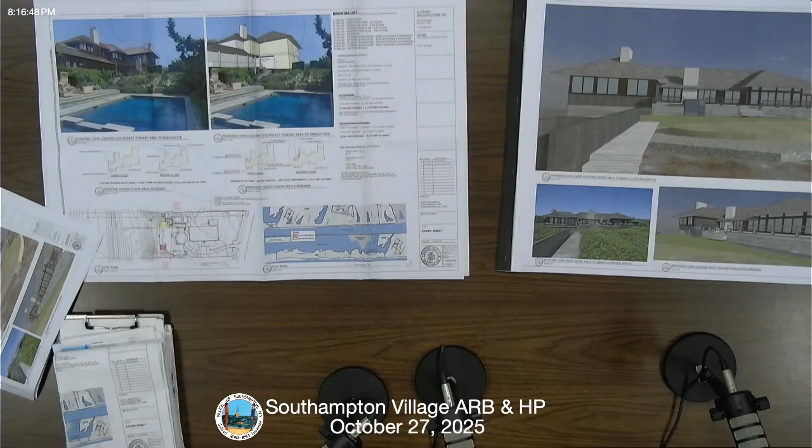Does anyone have any objections? I don't. Is there anyone from the public who would like to speak on this application, 1030 Meadow? Anyone? I'm sure no one called, because we're just not popular anymore. Motion to approve the application for the Ganek Residence, 1030 Meadow Lane. Second. All in favor? Aye. Aye.

Thank you so much. Although it's pretty small, they're doing well.

So now, driveway gates, so important. Harry LLC, 170 South Main Street.

You've been waiting all this time for this, but it must have been very amusing for you to watch. It's entertainment. I try to make it go fast. It's only 8 p.m. Don't tell anybody, they'll give us more applications. What, 18 projects? No kidding. And a lot of them were passed.

We have a pair of gates proposed here. CMAC, can you introduce yourself? Sorry, we were talking over you. Oh, no problem. House dates back to 1887, shingle-style house, one of the original shingle-style houses in Southampton Village.

This house sits 40 feet away from the property, which basically requires 80 feet zoning-wise. Not much privacy in the front yard. The gates are to provide a bit more privacy in the front of the house. All the rooms are exposed to the street, especially since there's a stop sign there and traffic stops in front of the house. Two driveways, identical gates for either side, north and south gates.

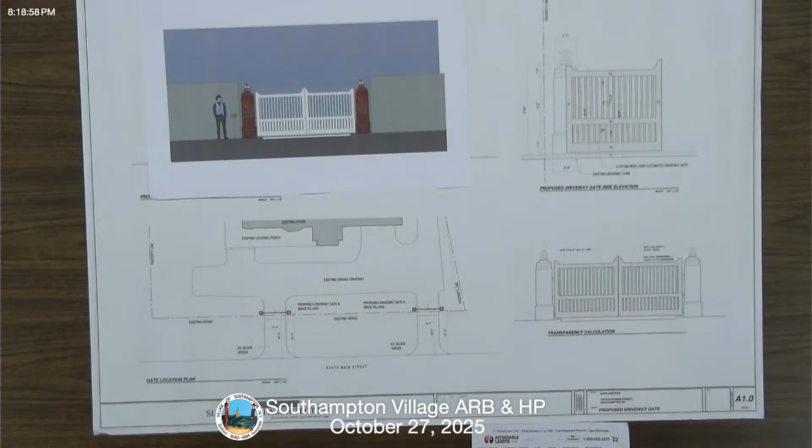Any question? How tall are the piers? They're brick, 6'7".

Okay, good. And what's the lot size? The size of the lot is one acre.

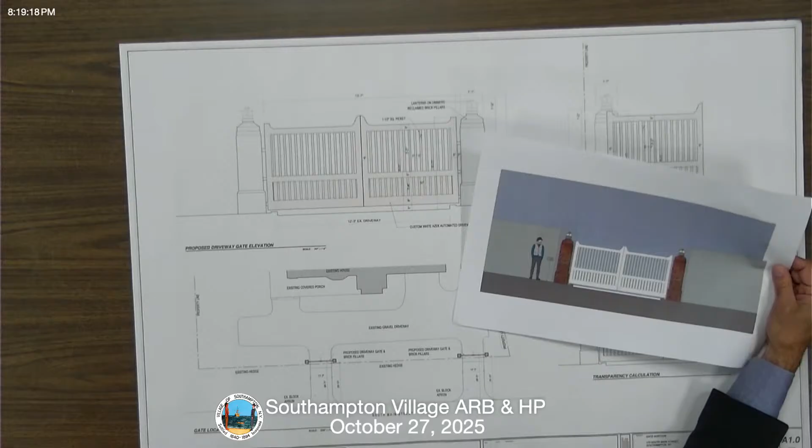And there's a light? What's on the top there? Oh, there are a pair of lights. On each one of the posts, there's a lantern. And they're dark skies? Dark skies, they adhere to that. I have to say that over and over again, it's like a broken record.

Thank you. Marine lantern. Is this house across from Toilsome Lane? Correct, very close. You've got the brick house nearby, two houses north, the old Wright house. This house is a shingle-style house nearby with a porch in the front. This was my house 30 years ago, I moved in there and fixed it up.

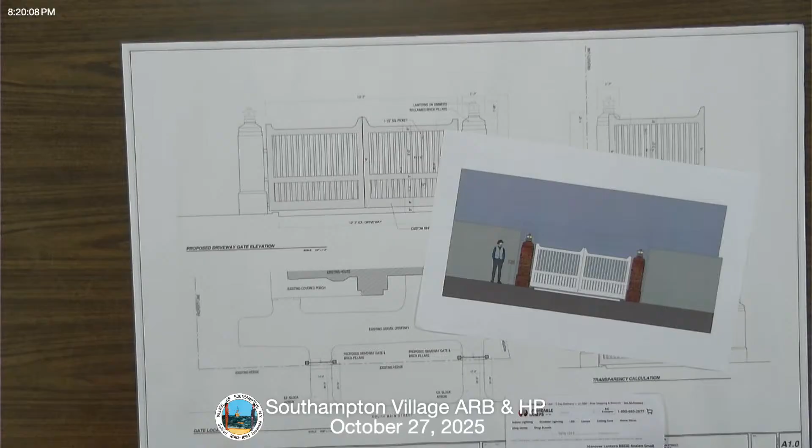Well, I have to say, I stop at that stop sign a lot. So do I. Does anyone have anything to say? Any comments? No, it's nice. And it meets transparency. Right, I figured as much.

Is there any commentary? And what's the means of access? The means of access is within the privet. It's not on the driveway. So it's not a gooseneck? It's not a gooseneck. It's basically worked into the privet, just on the edge.

But is it freestanding? It's not freestanding, it's within the privets, so you don't see the leg basically stand. Aren't we not doing that? You've done that before, there are precedents. We usually want it to be on the pier, or in the...

We don't, honestly, I'm not making this up. I realize the idea is not to have a gooseneck exposed on the street sidewalk. Our thing is not to have one more thing sticking out in front. It's not, it's actually within the property, within the privet.

How far back is it? I don't know, why can't you put it in here? I hear what you're saying, but they really are unattractive when they're exposed. The board's objection is not to have the gooseneck exposed on the street, which is not the case here. I'm not down with that.

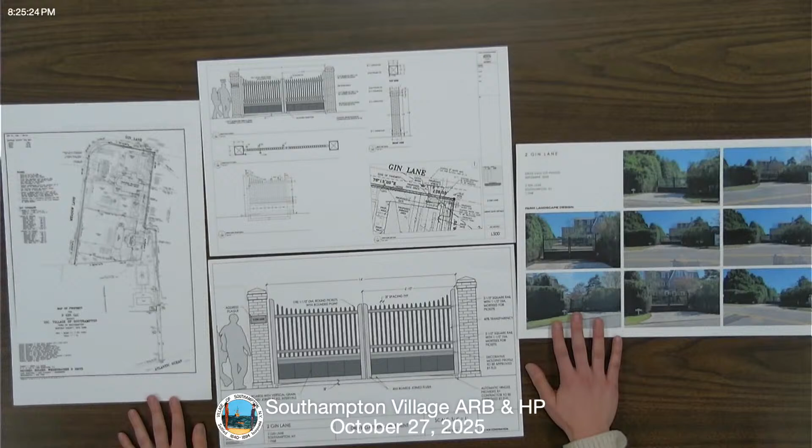How tall are the piers on this? They're 7 feet 8 inches. 7 feet 8 inches? Yeah, they're under 8 feet.

And they would be made of reclaimed brick that would match the reclaimed brick on the water table of 2 Gin, which is a historic house that was built prior to 1887. Nice job they did.

For the life of me, I can't find the color on these. What color? Do you need the materials, the color? I can screen share a close-up image. It's a dark green, but if the color doesn't work, we can do them in white. It has to be particularly assigned so that it's part of a contract. Does it have a written name here? The color might be dragon's breath.

So where are they listing even the brick? This is our problem, that we're hunting around instead of it being written somewhere we could actually find it - it'd go so much better. It is a reclaimed brick that was used on the house. It'll be the same supplier. I don't know the name of the brick off the top of my head.

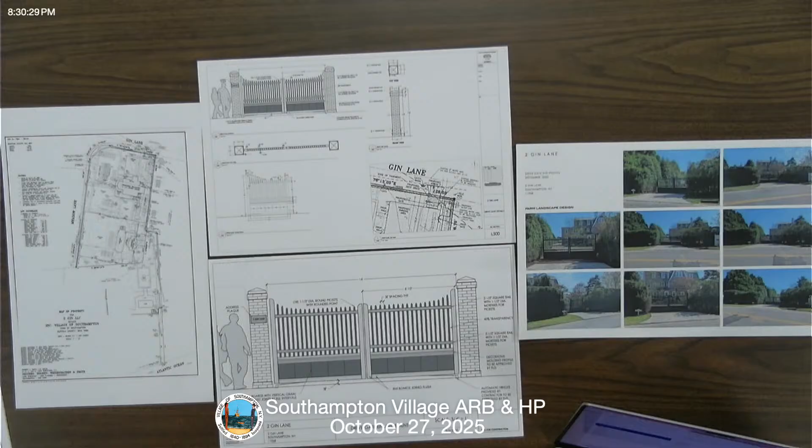Here, I have the brick. Oh great, I found it. But is it a name thing? It is New York used, it's a reclaimed brick.

Okay, but how about - did you find the paint color used on the historic house? How about paint, got anything? To match the existing house. That's good for me. Okay, so now we need a paint color, look in there.

And is it all one color, or is it three colors? It's one color.

I believe the name of the paint is Dragon's Breath, but I would need to compare it. From Benjamin Moore? It's not Benjamin Moore, it's like a historic green paint color, probably like Fine Paints of Europe. There's a Dragon's Breath from Benjamin Moore, but that's a dark gray brown. Well, it sounds awful. I'm gonna make sure it's the right one.